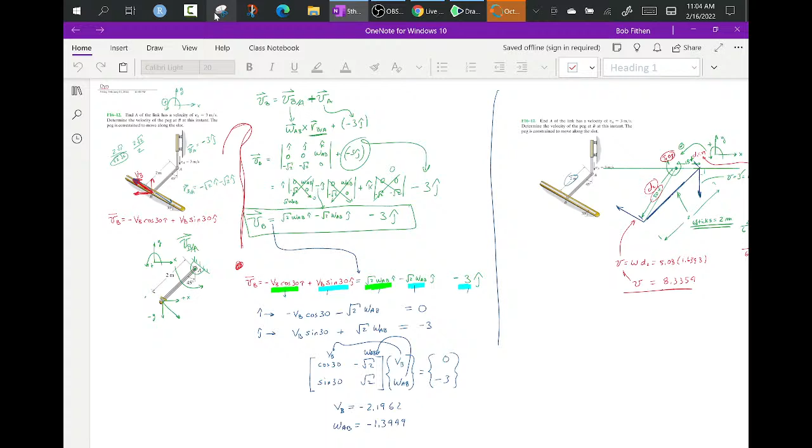What? That's not right. Okay. Okay. All right. Okay, let's see. Oh, wait.

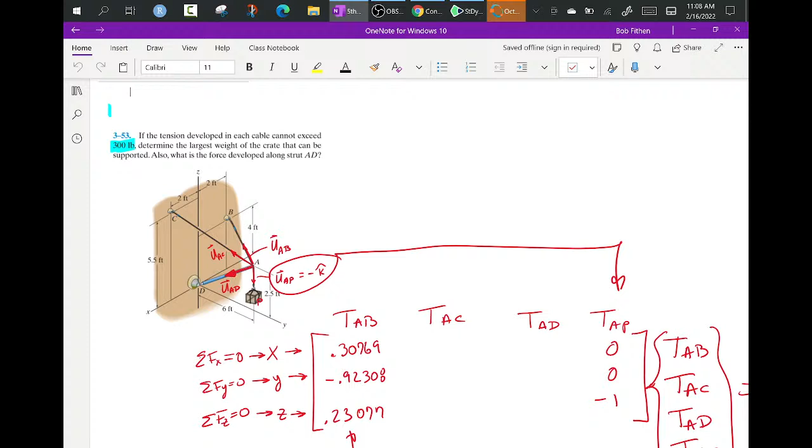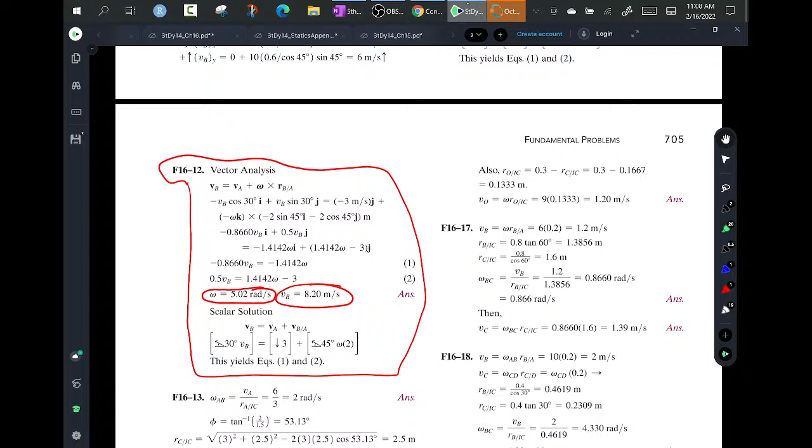All right, so we kind of set this up so that, the book, which I probably should reference, here, let me go in and reference this so that you can see not just, okay, get there, not just that they're different, but how they're different. So let me just pick one. So here's a typical problem.

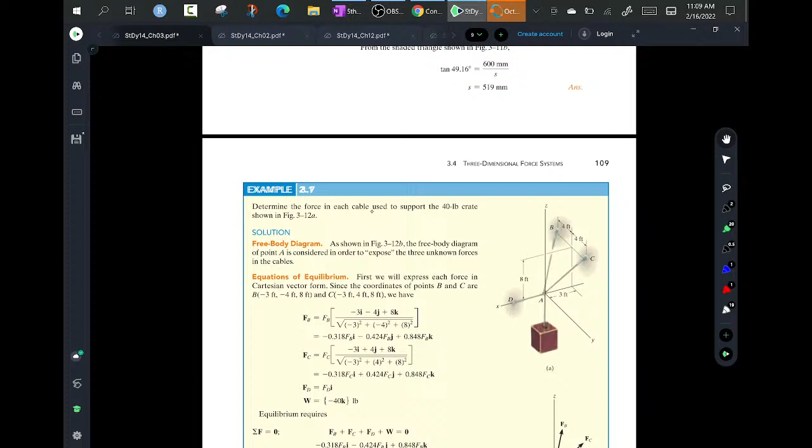So what he's doing, and it turns out he's doing the same thing, it's just I'm formulating it a little bit different. So what he does, let's just look at this for a minute. I don't know why that's the way it is, that's weird looking, that really looks weird. It's like they decided it was going to be one example and then changed the number. I see a 2 and then I see a 3, 2 points and a 1 and a 7. I don't know, I got a faulty PDF or something.

So what he does is he essentially does the same thing. So he's looking at B, he's calling them F's, I've been calling them T for tension. So he's showing the force going up here, and if you want to get to that point, it looks weird, but you go 3 backwards, up 8, and then back 4. So he goes 3 backwards, he's going back here and then up 8. And then he divides by the length of that vector, multiplies times the scalar, and you get these 3 values, the 3 numbers in the FB in each one.

Then he turns and does it for C. So I'm just laying this out so you see I'm actually doing the same thing, but instead of writing the extra in between, maybe I'm shortchanging it. Maybe, I don't know. Heads back 3, up 8, and forward 4. Goes back, then there's 8, and you got the same length. So not too surprising, you see some of the same numbers here as up here, except this one's a positive, that one's a negative. So you see all that.

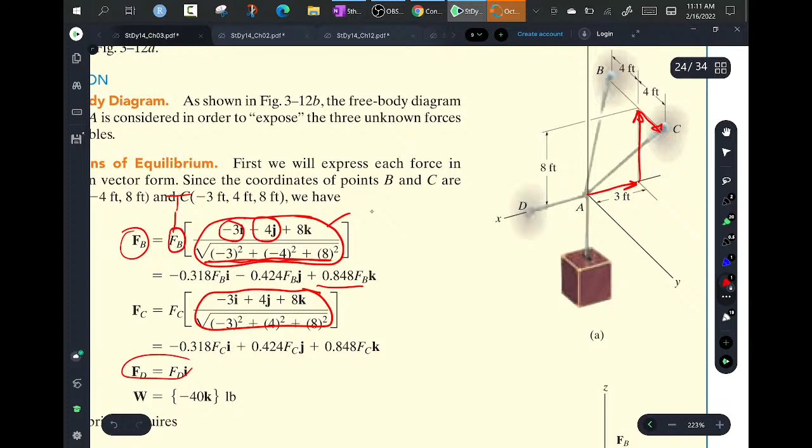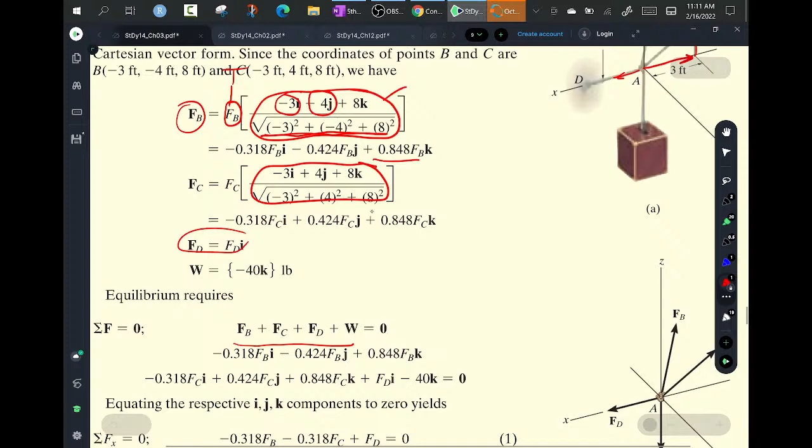He's basically making this, hang on, okay, it's not listening to me. He's making this his unit normal, or his unit vector, that's his unit vector. And he has his FD, which just runs that way. And then what he does is he puts them together. So that's what we're doing. But then what I do, I don't think he does, list it kind of as a matrix. And if you look at it, you could take this and turn it into matrix form.

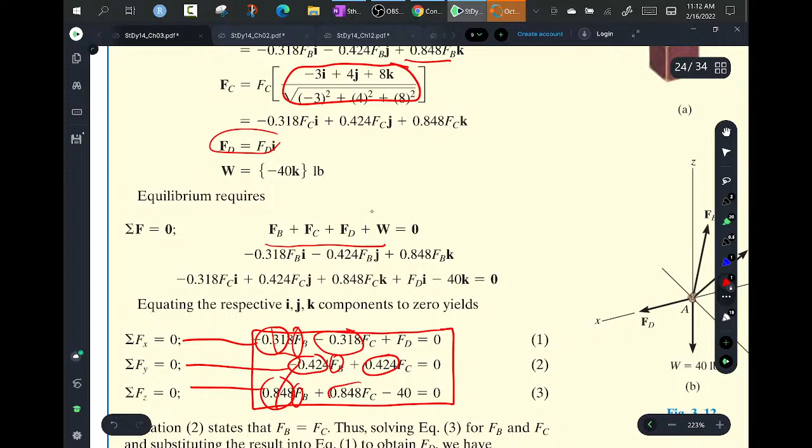And what you find out is the coefficients. If you find, like, here's the FB, here's your FB, and here's your FB. If you look at the numbers, that should be the I component, the J, and the K. So what you see is the unit vector, you see the unit vector off of FC, and then you see the unit vector off of FD, and then you got your 40 that you move to the other side. But he says just solve it. But I focus on first listing them as X, Y, Z, and then focusing on the columns and making this the connection that these are the base vectors.

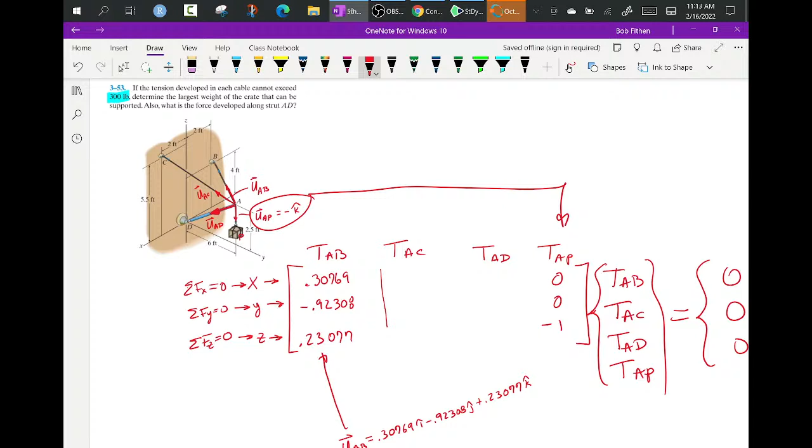And so let's continue that. So I'm not doing anything different than he's doing, it's just, instead of writing the extra part, you know, if you look back at the last 2 lectures, you'll see me sort of formulate this. And at that point you realize, hey, shoot, each one of these is the unit vector in the direction of that. So I'm making the matrix straight up.

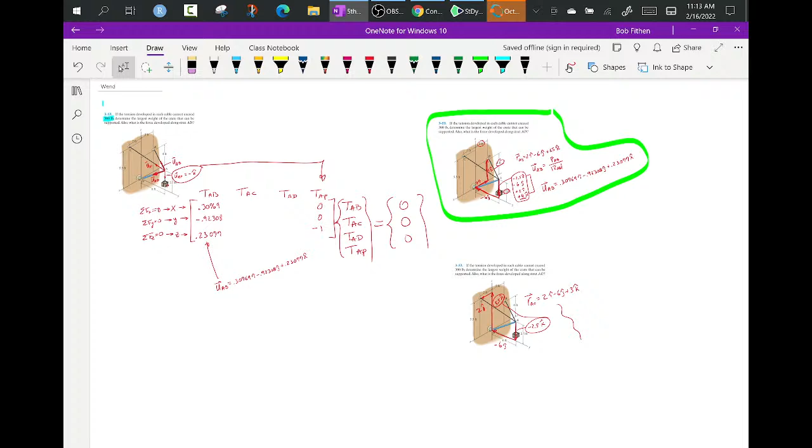There's nothing really different about what I'm doing, so looks like I need to deal with this one. I did that over here, but let's see, I didn't finish it though. So I was looking at the unit vector in AC, I got over here to this, and I was like, okay, I need to finish this up.

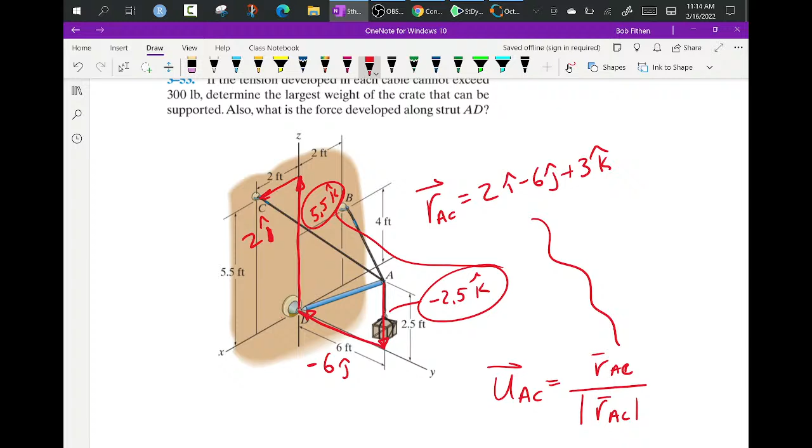The unit vector AC is nothing more than the vector AC over the magnitude of RAC. Now, unfortunately, I'm going to have to re-enter these all back, because I'm sure I had them at one time, but I don't anymore.

So in other words, RAC, let me move it here a second. RAC is equal to 2, comma, minus 6, comma, and there's my vector. So if I want to know UAC, that would be RAC divided by the norm of RAC. Did I type that all right?

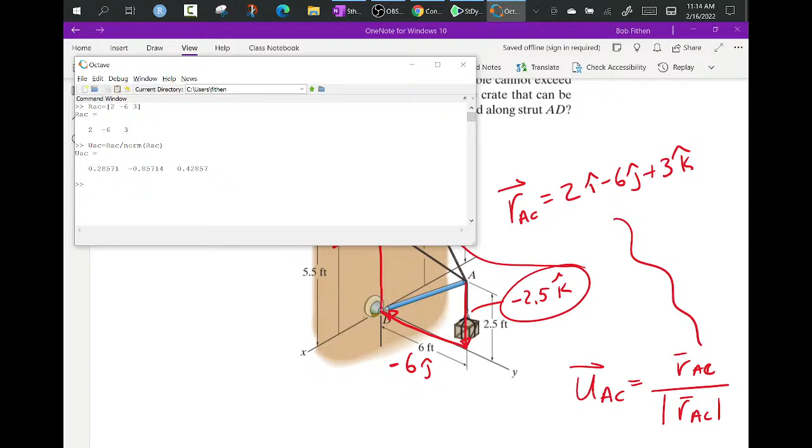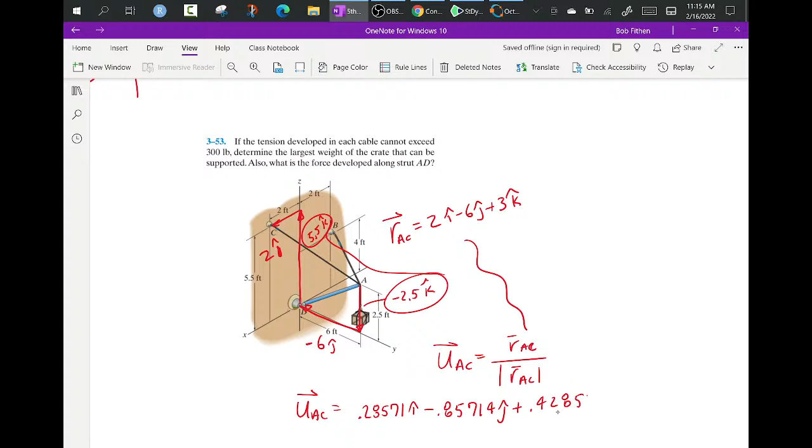So I get this: 0.28571. So UAC, is that minus or plus? 0.28571, got to be plus, minus 0.85714 J plus 0.42857 K. So now I got that.

So what I'm going to do, this time I didn't write it at an angle, so I'm happy about that. And so here I found this unit vector.

So what I'm going to do, I'm going to copy that unit vector. I'm not going to move it, I'm going to copy, Control C. I'm going to head over here, and I'm going to put it maybe right there. Okay, so now I'll be able to just go in here and say, copy this one.

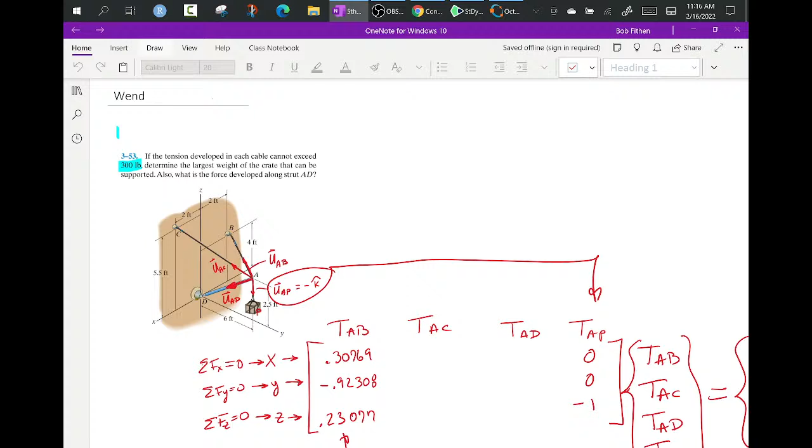Oh no, is it not listening to me? This dumb thing, hang on. Okay, I hit enter, come on computer. It should come back exactly where it was. And hopefully allow me to select a different pin. Don't know why it does it.

So I'll copy those: 0.28571 minus, 0.85714, 0.42857.

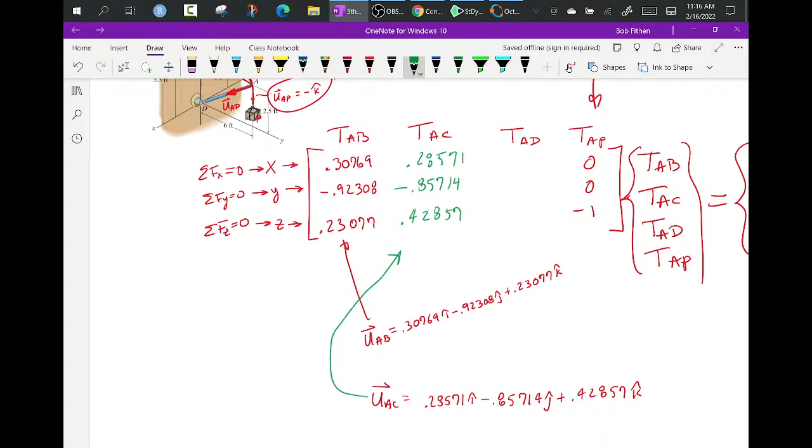Okay, and the last one is one in which I made a comment about earlier. I think I'll just copy the picture from here. I'll slide it over here and drop the picture right there.

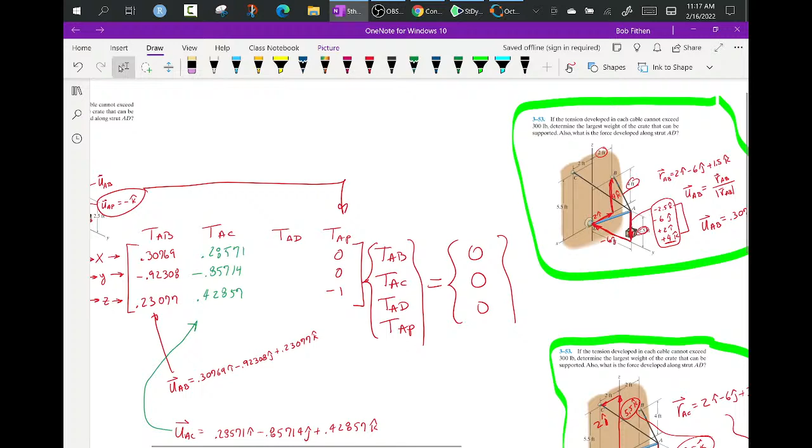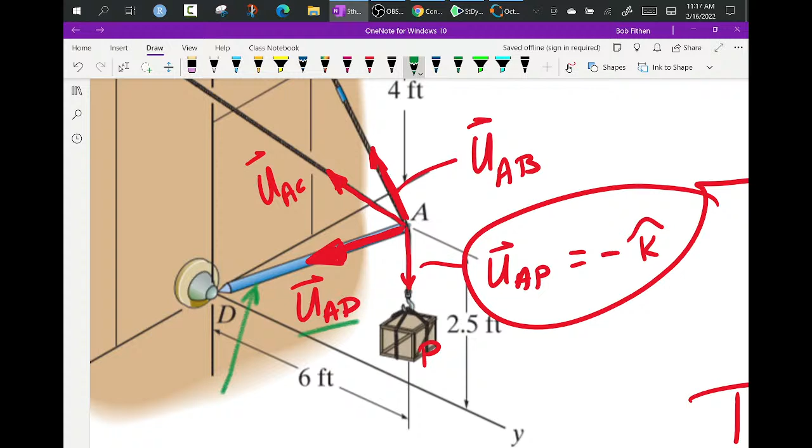Now, what I did is I went ahead on this one and pointed the vector towards D from A. I'm pretty sure that this little member is going to be in compression, which means it's going to flip over. But I'm doing this on purpose, letting you know that if it flips, it's telling you the direction you've assumed is the other way.

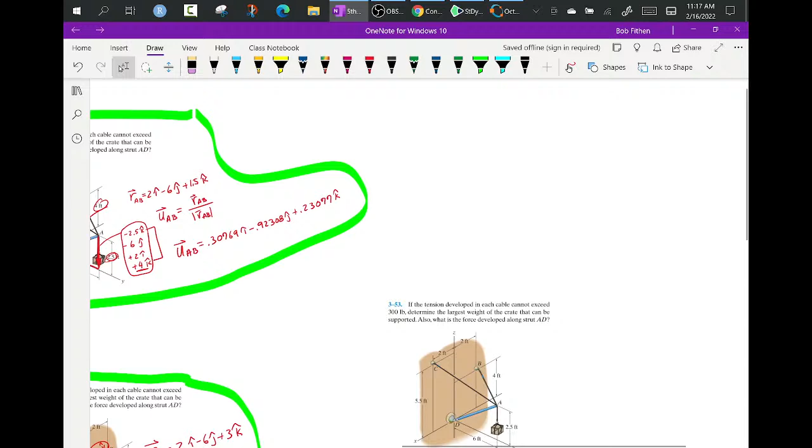So I have picked purposely, let me use this. You're kidding. Okay, well, I guess I'm stuck in this pen, so I'm going to do that. Okay, so I have picked that.

So I'm going to draw R from A to D. I don't know which way I want to go first, but I'll go this way first till I hit here, and then I'm going to go that way. And you notice I don't go any in the X. It's basically, I kind of see this as he's lining this up directly under that. So I get a 0I.

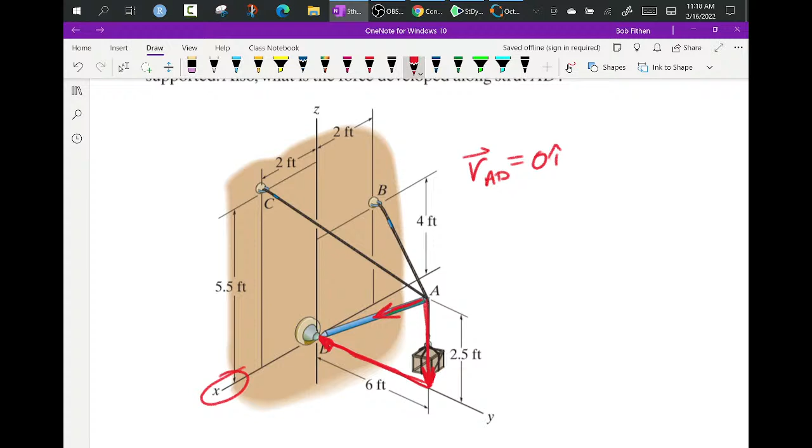And as far as the J, I'm going back, this is a minus 6J. This is a minus 2.5K.

And so now if I want the unit vector going in that direction, I got to put RAD over RAD. Man, all of a sudden I'm hungry.

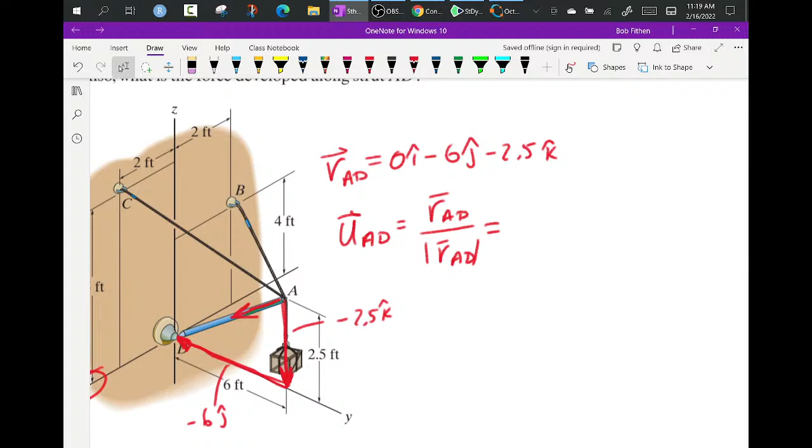Okay, so I'm going to slide down here, go back to this, and I'll just say RAD is equal to, I get a nothing, comma, minus 6, comma, minus 2.5, and yeah, I mean, I can just copy it down. So the unit vector UAD is equal to RAD divided by the norm, or the length of RAD.

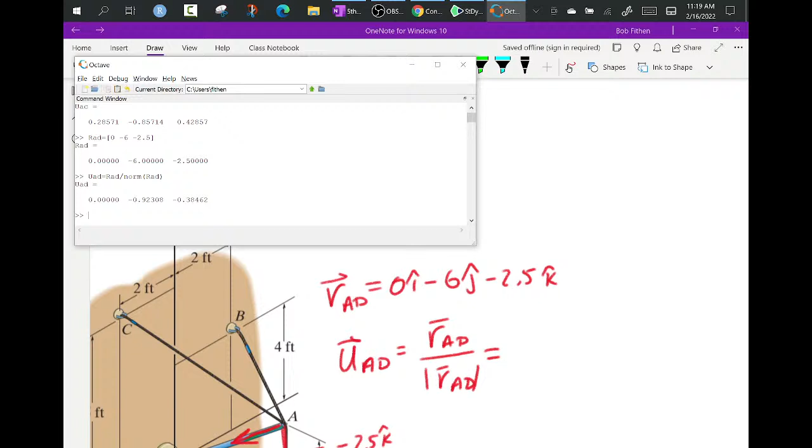Okay, so it's easy, the first one's pretty easy. You know what, I'm going to write it underneath it because I'm going to copy it. UAD equals to 0I. And I'm writing that because there is going to be a location in that matrix that I'm going to need to know, so I'm going to write it anyway.

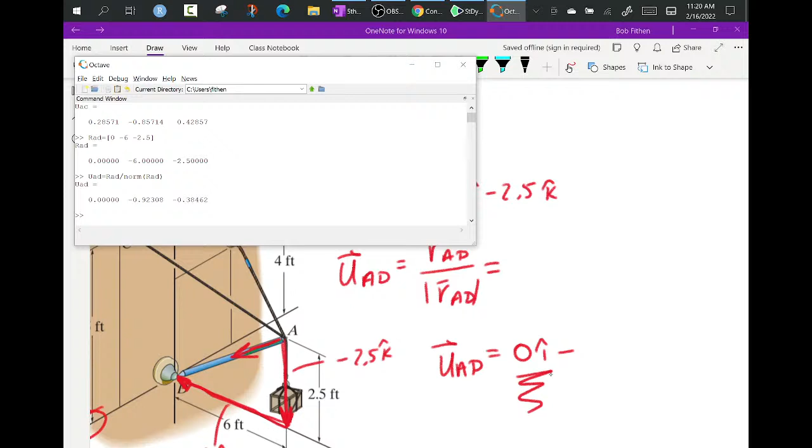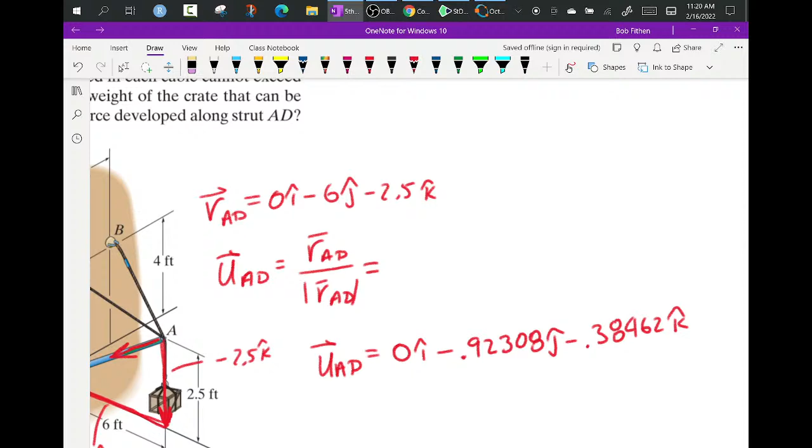0.92308, come on slide over, minus 0.38462. And unfortunately I wrote it at an angle, but okay.

So I'm going to copy this thing, slide back over here, and this time I'll just put it right here. Let me move it up a little bit. Hey, I don't know, I'll just stick to the pen and change the colors in the pen.

Okay, so this one goes here. I do have an entry that I have to put. Why did it do this? It changed the size too. Okay, I do have an entry I need to put, oh, it's not letting me.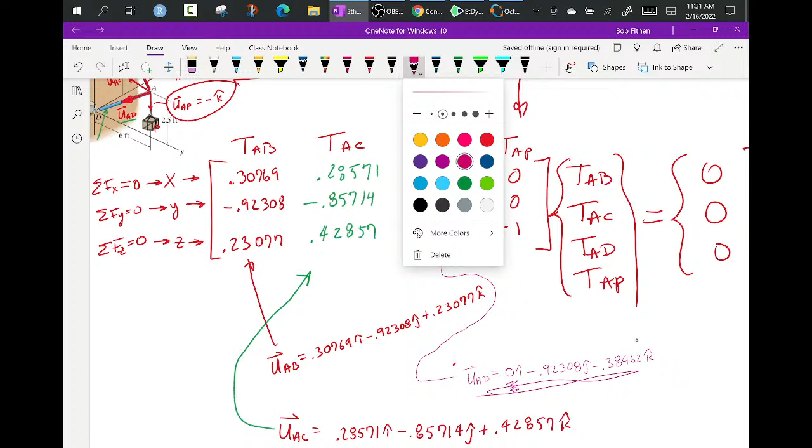Okay, yeah, I do have an entry I have to put here. Then I have a minus 0.92308, and then I have this one, minus 0.38462. So at this particular point, I have everything filled out.

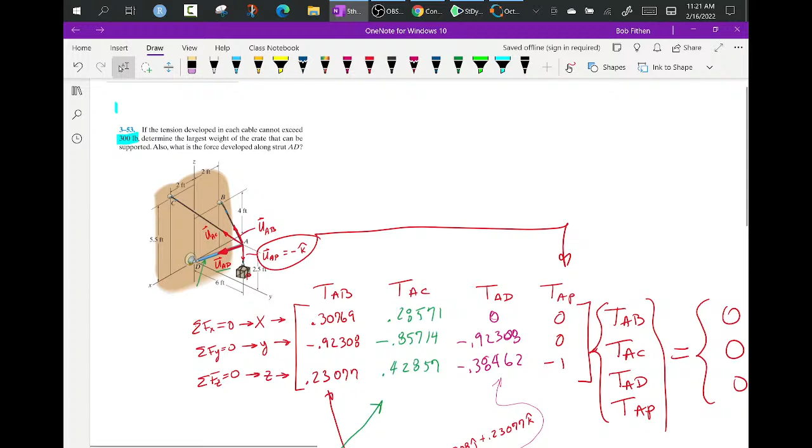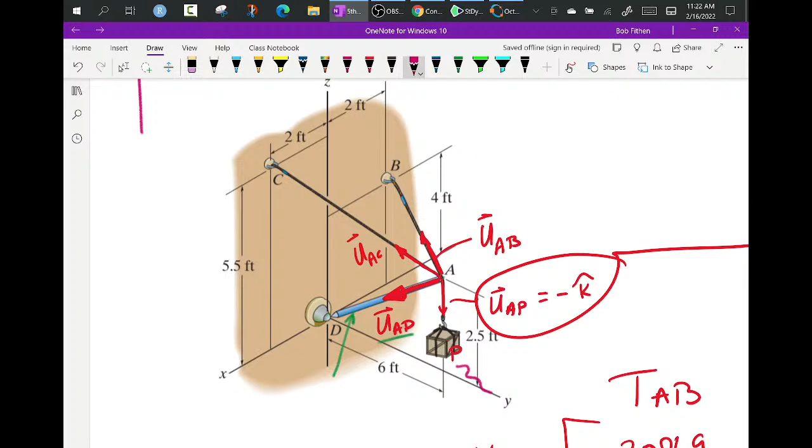Now, if you remember last time, I sort of bailed on one thing, and that is, yeah, that's 300 pounds, but I didn't really identify it as being 300 pounds yet, but now I can. So if you look at this, I got 3 equations, I got 4 entries, but this one, 300 pounds.

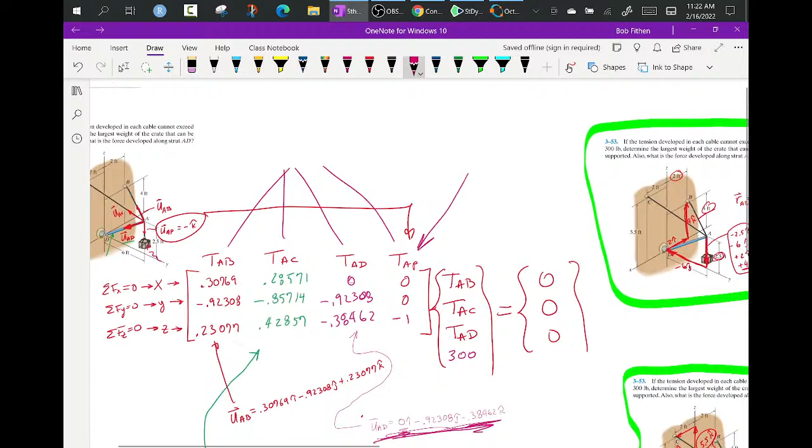So what I need to do is I need to take this down here and put 300 in it. Now, I kind of pushed the landscape here, so I think what I'm going to do, get this junk, kind of slide it under here.

Hello? Man, it's really lagging. I don't know what's going on. There's probably some weird process running or something.

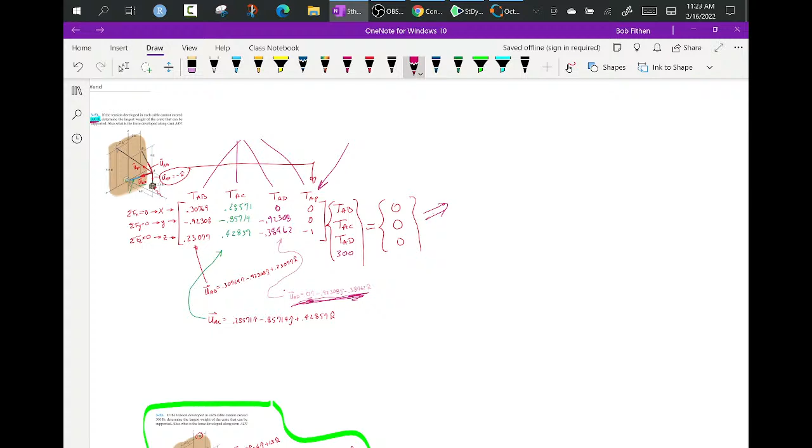So now I'm just in the arena of matrices. So I'm going to take that, and normally if I was writing on the board, I couldn't do this, but now I can do this.

I'm going to go ahead and take all of this. I've already written it all. Do a copy, slide across here and sort of drop it right here. I've learned that it drops underneath whatever mark I make.

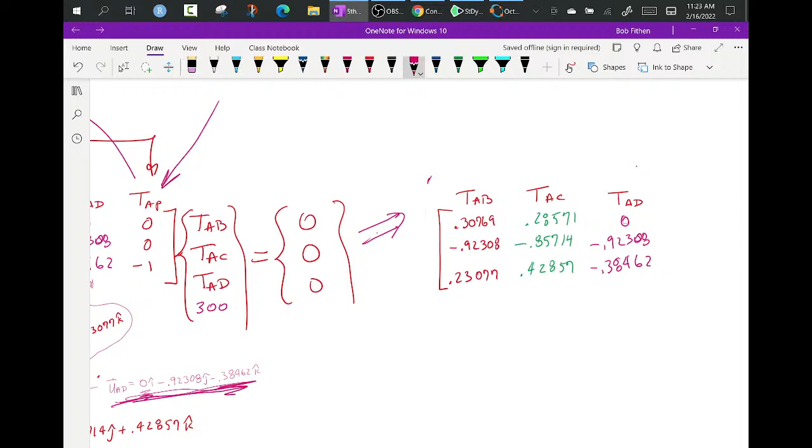And then, okay, then I have this now. And now I'll go ahead and copy all this, but I'm going to erase a part of it. Do Control C, I'm going to drop it maybe right there. However, what I really need to do, I need to take this off and these little chicken scratches around here off.

And if I multiply the 300 times this column, I get, okay it's a minus, so I get minus, and then I get nothing but 0, 0, and 300. And then I get, on the right hand side, I still get this right here.

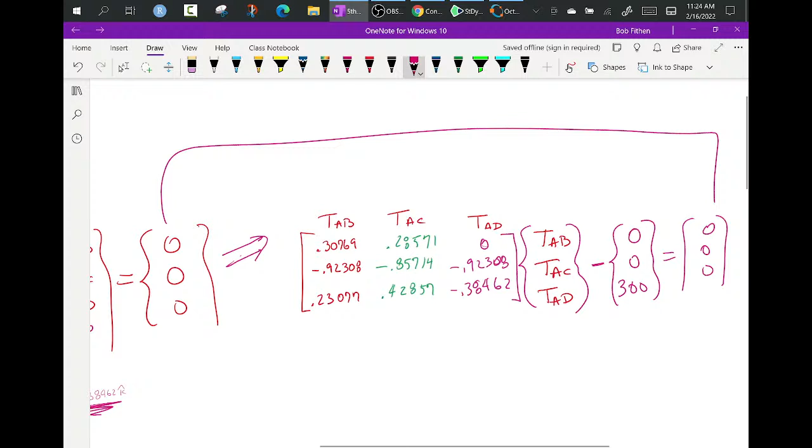So what I've done is I took this column, multiply it times here, left it on the left hand for the moment. I still left it on the left hand side.

But now what I'm going to do, since it's a minus, I can move it to the right hand side. And so let's see if I can do that, move it to the right hand side, then I get that. Because it changes signs, because it was minus 300 on the left hand side, move it over, it becomes plus 300. So I just changed that minus sign into equal.

There we go. Now I still have this in Octave or MATLAB and this in there, so I really need to go put that one back in there. Okay, so I think instead of typing all those numbers, I may go back and do the TAB.

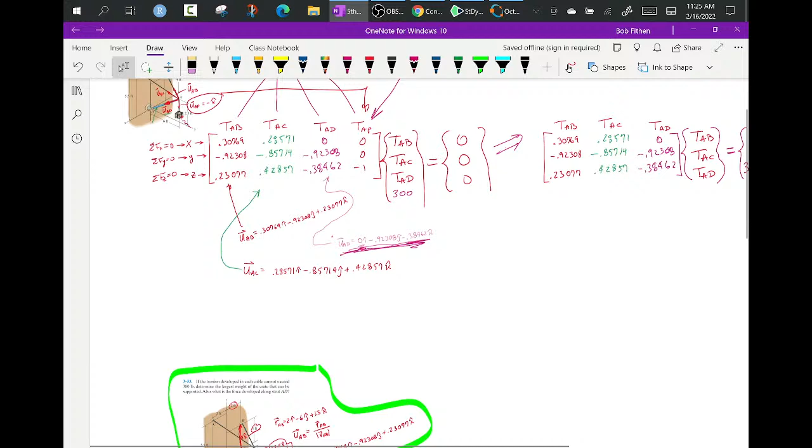Come on, what's going on here? This was in there last time, so I'm going to retype it in there. Okay, so RAB equal to, it's a 2 space or comma, minus 6 space or comma, 1.5, and I get that.

Now I got UAB equal to RAB divided by the norm of RAB. Gives me those numbers again that are listed. So these numbers here are listed right here.

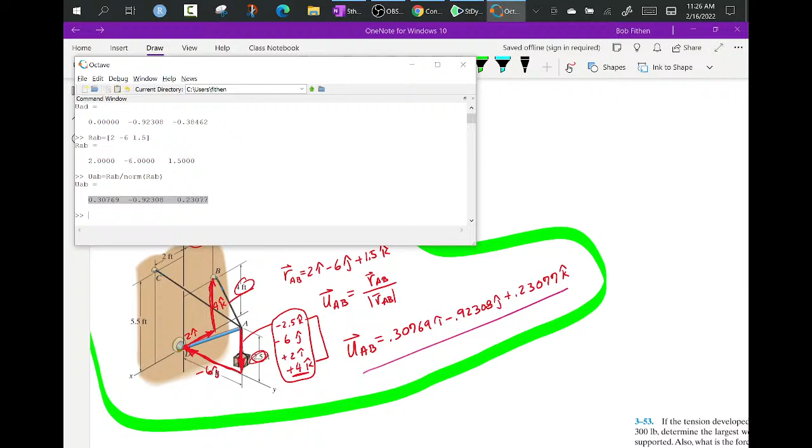So how, okay, so what I've got here, let's go back up here. And this is the reason I left this up on top. And actually, I'm going to do something interesting. I'm going to take this off. I'm going to say this is UA.

You have to remember, TAB is attached to UAB, and TAC is attached to UAC. So these are the vectors, and the reason I'm doing that is because I have these in Octave.

Right now I've got a 1 by 3, one row, 3 columns. So what I need is 3 rows and 1 column. Luckily, MATLAB or Octave obliges very easily to that.

So if I look at UAB, it's a 1 by 3, but UAB with an apostrophe, like in MATLAB and Octave, that's taking a transpose. So it turns it. Now I can come up with the matrix equaling to... you do equal.

UAB transpose. Now I'm going to do it wrong first. I'm going to put UAC transpose, and then UAB transpose. So what it did is it stacked them on top of each other. So that's wrong.

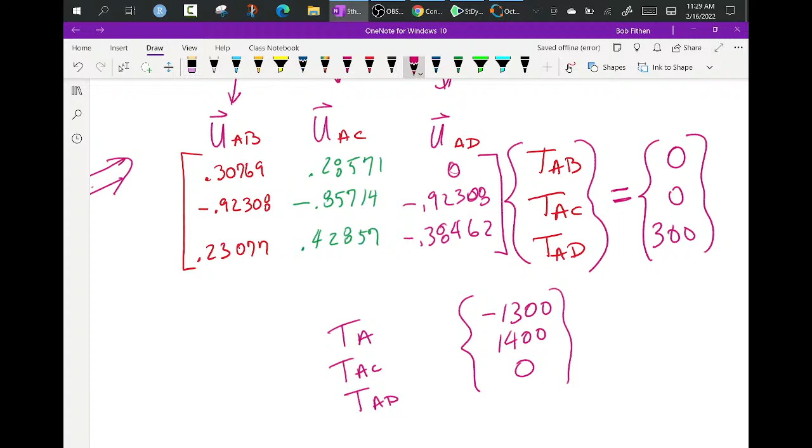TAD. No way, that is completely wrong. But wait a minute. Let's make sure I did this correct. Okay, first, did I put it? It's going in the minus Z direction.

Let's double check, TAB. I should get it going a little bit to the right. As far as the Y, it's going back. As far as the Z, it's going up. So I feel like I'm okay there.

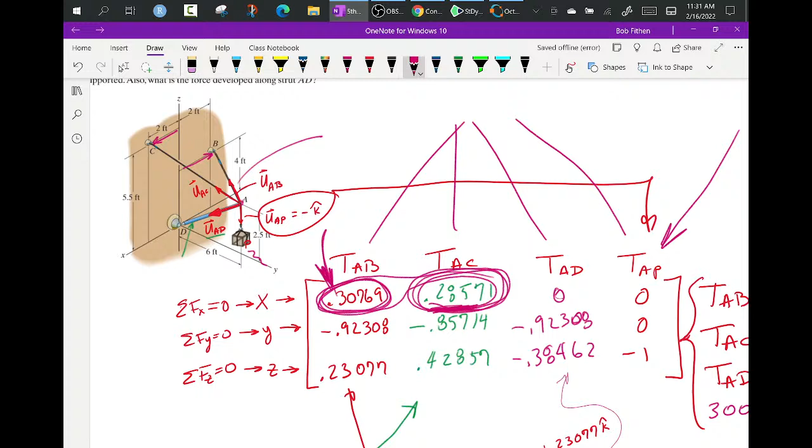Now, TAC, going back or forward. Uh-oh. This is the X, and this is the X. Uh-oh, because to get from A I had to go this direction, and then I had to go this direction. So the TAB, that has to be negative. That value has to be negative.

Whoa, I made this mistake the other day. Okay, let's see what I did here. I went minus 6 in the J, but that is not plus 2, that is minus 2. And what?

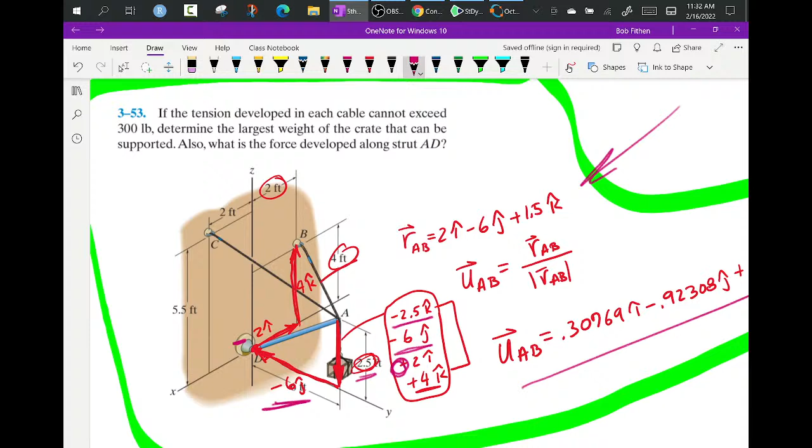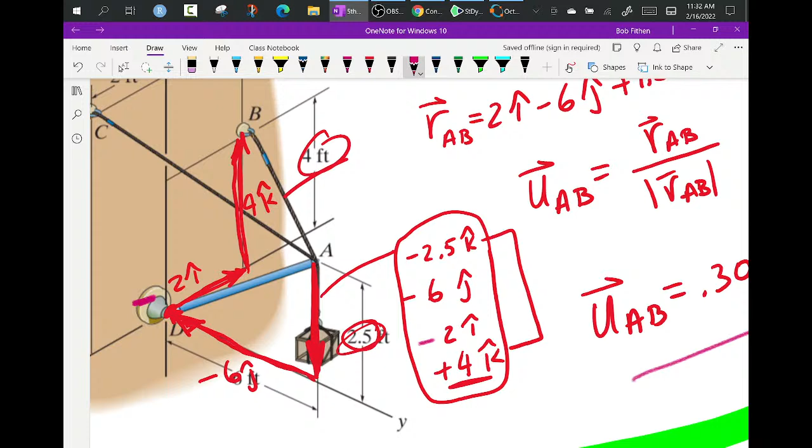Okay, wait a minute, let's double check this. Okay, I went down 2.5. I went backwards in the J. I went backwards in the I. Okay, wait a minute, this has to be a minus sign. Then I went up, so in fact there's a minus sign sitting right there.

Believe it or not, I think everything is A-OK because the magnitude's still the same. I think what happens is this becomes a minus, so this becomes a minus. Now, if I made one mistake, it's possible I made two. Okay, where's my pen?

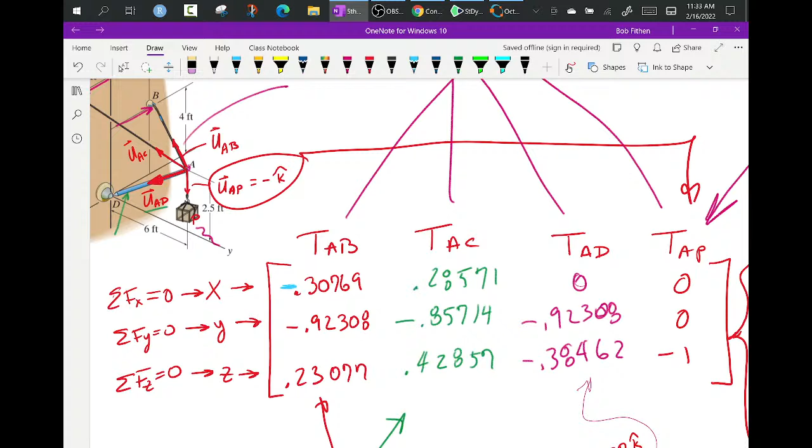Here, I'm going to make it blue or something here. There's my... and why is it making it bend like that? I don't know what it's doing. So, made a mistake there. Let's see if I made a mistake on the second one. So there's my first mistake. Let's see if I've made another mistake.

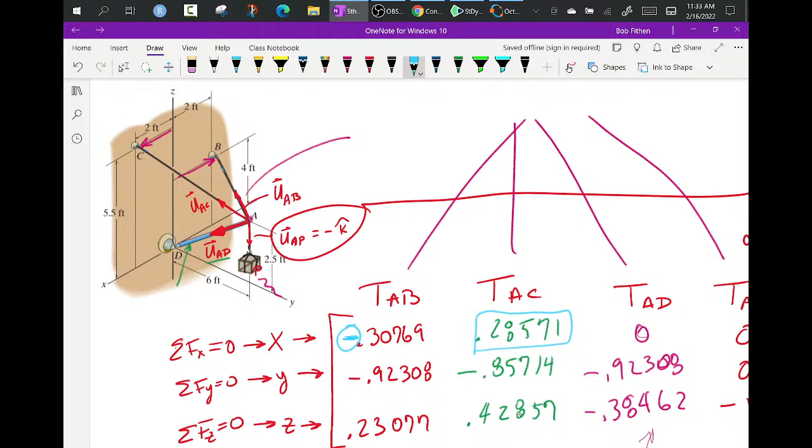Okay, this has to go, it says positive. That's the positive direction, so yes. Is that negative? The y direction. Now, at first glance, you may say it's still 6 on either one, but this was a different height than that one, so this value here may not match that one. But the direction's okay, and then the direction in the z, it goes up a little bit more than this one.

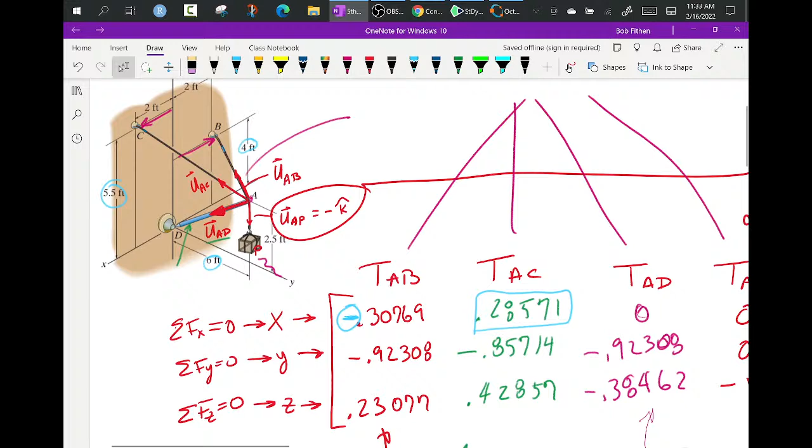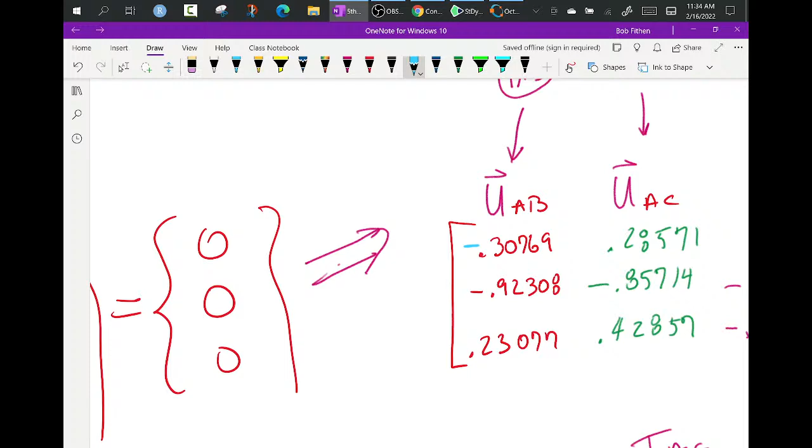Now I'm going to go ahead with it with my fix on TAB and see what we got here. Okay, here's my fix. Let's see what we get. So it's not equal to that. There's no way that's going to be the case.

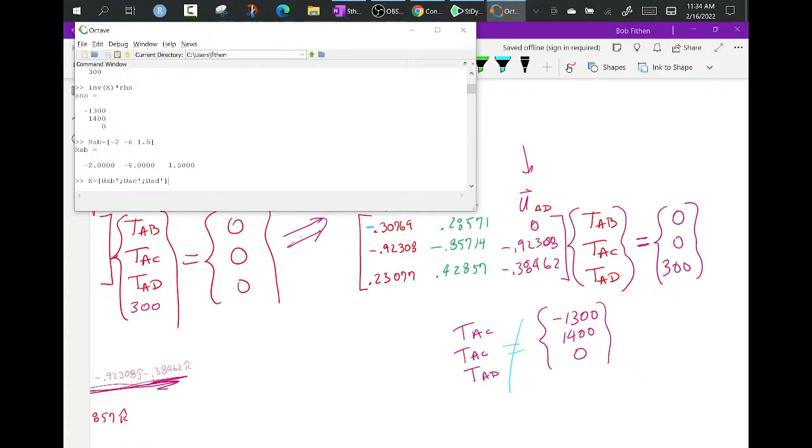Okay, so let me go fix my TAB. There's my TAB, that was supposed to be a minus. Okay, that changes it to a minus sign. Now I'll go ahead and do that. Looks like I'm okay there. The right-hand side should not change. All right, so that had a big effect.

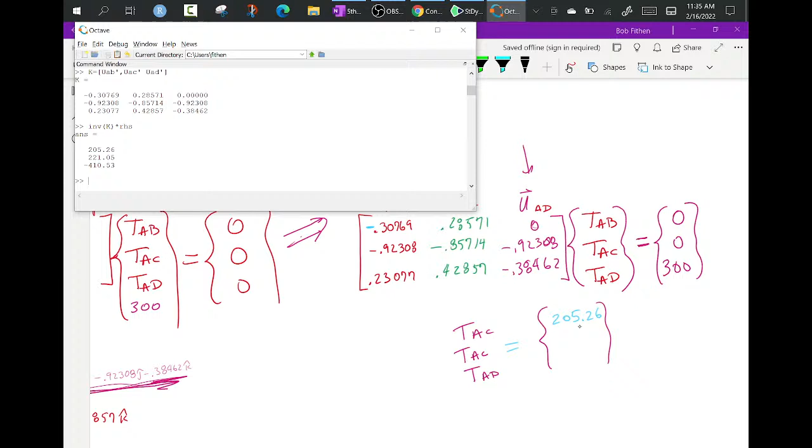So one little mess up, which actually didn't occur today, it occurred the other day. 205.26. I'm still not sure that's right, but there's no way... there's just no way. And minus 410.53. So the first thing, I'll look at the numbers in a minute.

First thing is that became a minus. All that means is instead of hello computer, hello. Okay, all that means is my assumption that it's going this way is totally wrong.

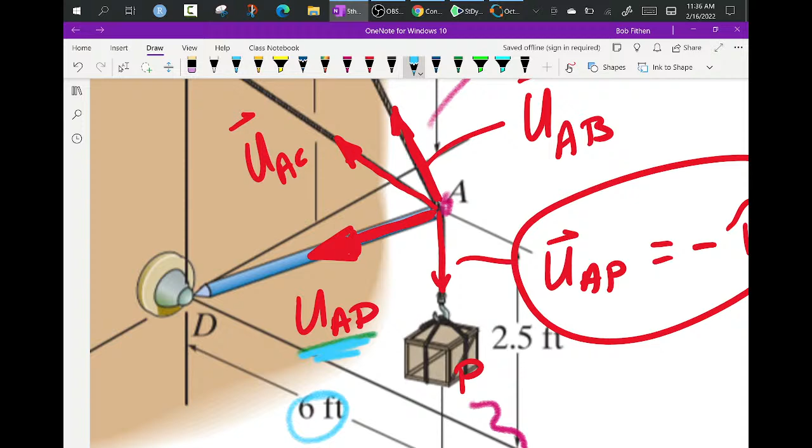It actually goes the opposite direction of that vector. That makes sense because it's drawn as like a funny rod, and it's not in tension, it's in compression. It's sort of holding it up. So I did that on purpose, but I will tell you I didn't make that other mistake on purpose. But hey, that's the way the world works. There's lots of mistakes, that's why you have to check things.

Okay, now I'm going to check the answer. So to do that, I got to figure out what the problem is. 353. Either dash or dot, 53. I don't remember, but I do know it's 353.

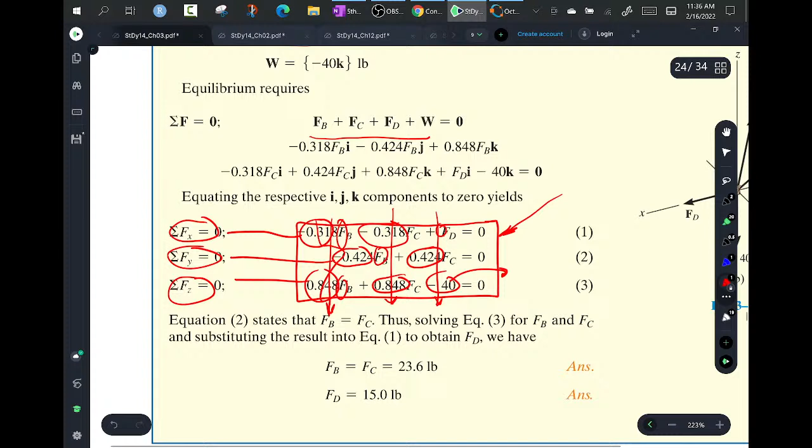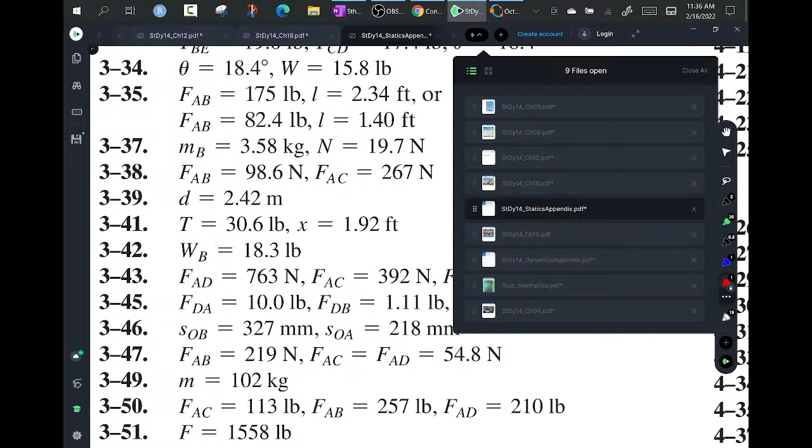Okay, so if I go here... gosh, this thing is slow. I'm going to have to try to figure out what's going on here. Huh? Oh. Did I get the wrong number? Is that 353? Wait a minute, is it F353? 3-53.

Oh, what? Wait, he wants to know the strut. Determine the... oh, the largest weight that can be supported. What? The tension in each cable cannot exceed 300. Oh, I read the problem wrong. Okay, we can fix this.

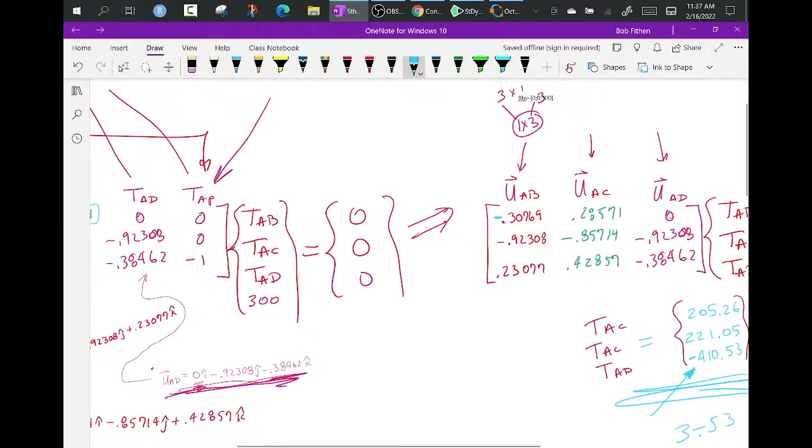Here we go. If 300 pounds gives you that, the question is, if we want to, here's what we'll do. I read the problem wrong. So let's do this. Boy, I goofed this one up big time. Instead of 300 pounds here, I'm going to go back and say it's 1 pound.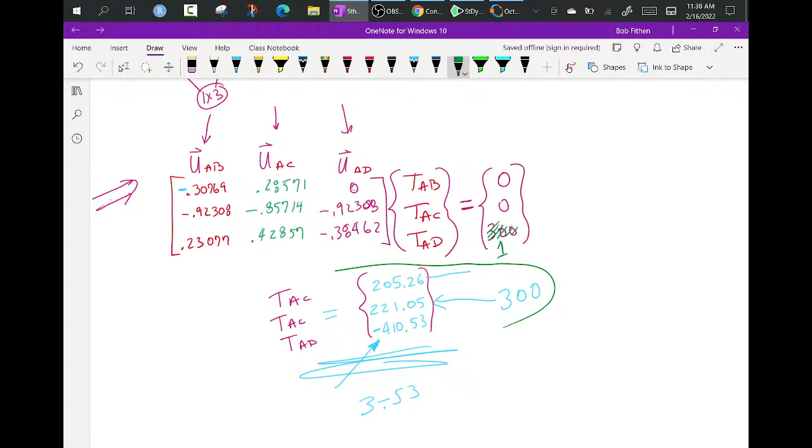For 300, you'd get this, right? Now, if you got 1 pound, what would you get out of here? TAB, TAC, and TAD. So this is easy enough because all I need to do is go change my right-hand side.

That's not where the right-hand side is. This is where the right-hand side is. So I'm going to change my right-hand side, which is now that. I'm going to change my right-hand side to this. Looks like rain out there. So with my right-hand side that, now I go back and take the inverse times the right-hand side.

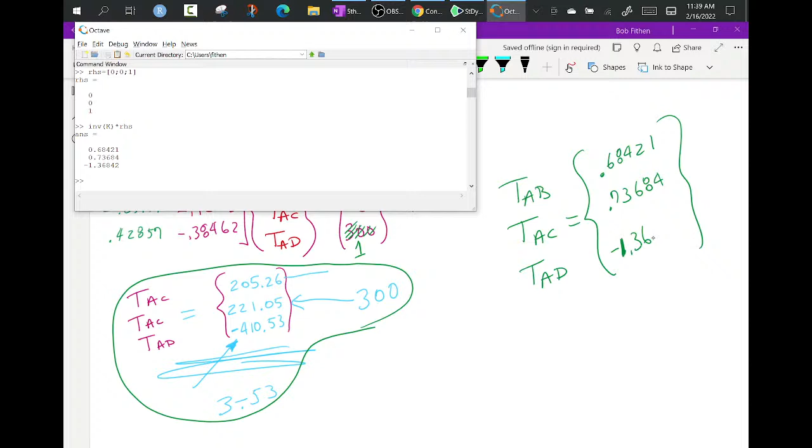Okay, this is funny. 0.68. So if I put 1 pound on there, 6421, then 0.73684, and minus... okay, what was that? 1.36842.

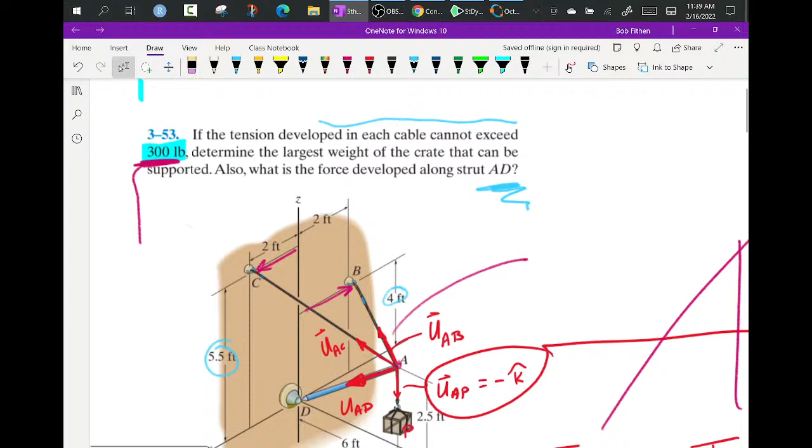Now, okay, I just jumped. I didn't read the problem right, so I've kind of botched this whole thing up, but the method is still fine. If the tension cannot exceed 300 pounds, what's the largest weight? So now all I do, okay, hello, is I go over here and I say 1 pound gives me that, but it can't be more than 300. So the largest for 1 pound is that. So what do I multiply 1 pound times to equal that?

So here we go, I want 0.73, I'm picking the largest one. 0.73684 times the weight, because the weight is 1 now, equals 300. So if I put in, and we'll double check this, 300 divided by 0.73684 gives me 407.14 pounds. Now, with that, let's double check.

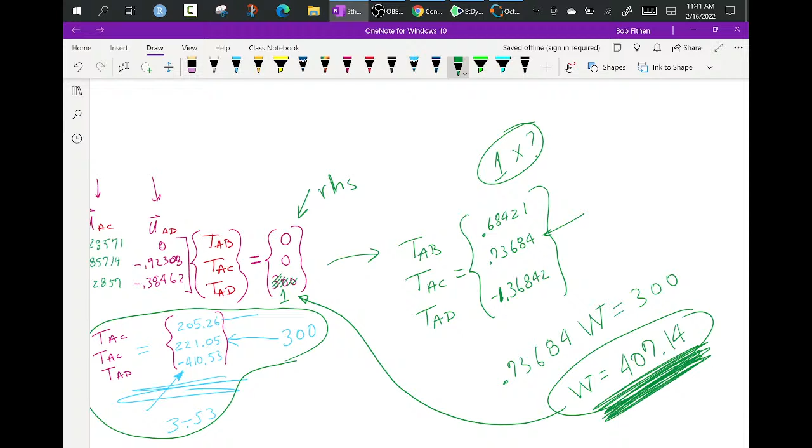What would happen if instead of 1 right there, I put 407 pounds? That's easy enough. So go back to my right-hand side, and instead of 1 pound, I put 407 pounds. And I'll even put the decimal point.

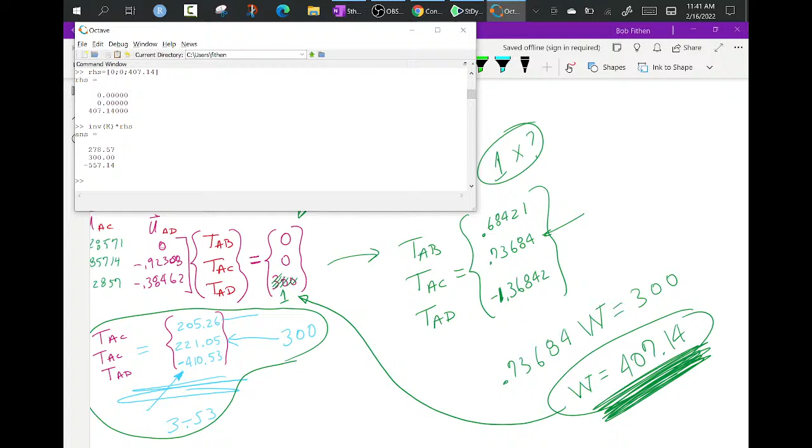So there's my force or weight. Do my right hand, do my solution, and lo and behold, we see the middle number. So if I put 400 pounds in TAB, TAC, and TAD, this would be this, this, and this. This would be, well, this was the 300, so we matched that one.

The other one's 278... I forgot. 57. And the other one was minus 557.14. Minus because I made the assumption it was in tension, and in fact it's not, it's in the opposite direction. So, did we get the right answer now?

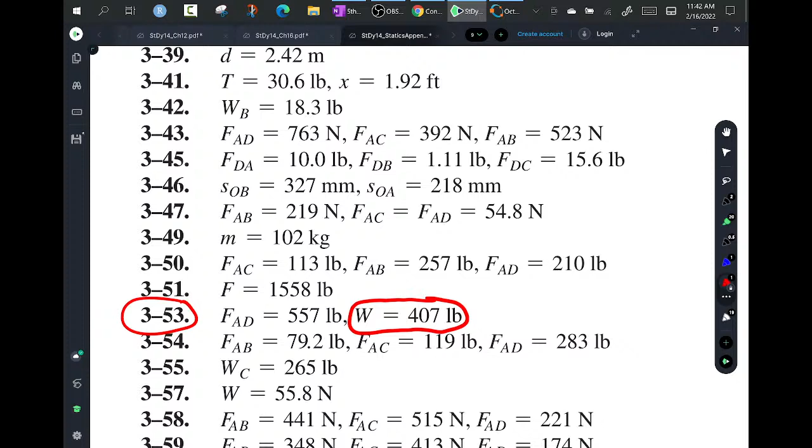Let's see. Okay, the weight, 407, so we got that. And then the other one was the force in the strut, was 557, which is that. He never asked for that, but it's less than this anyway. So sorry for the botch up, but that's okay, you just keep going through stuff.

Key is if you botch up, you just accept it, go on, figure out what you did wrong, go from there. Let me see if I can change.

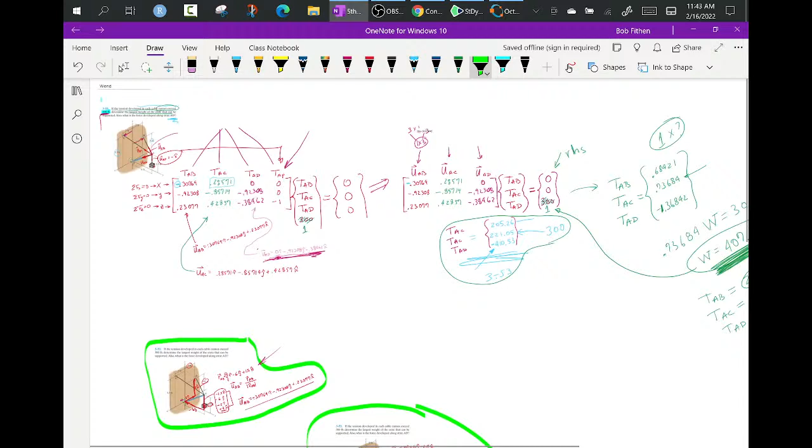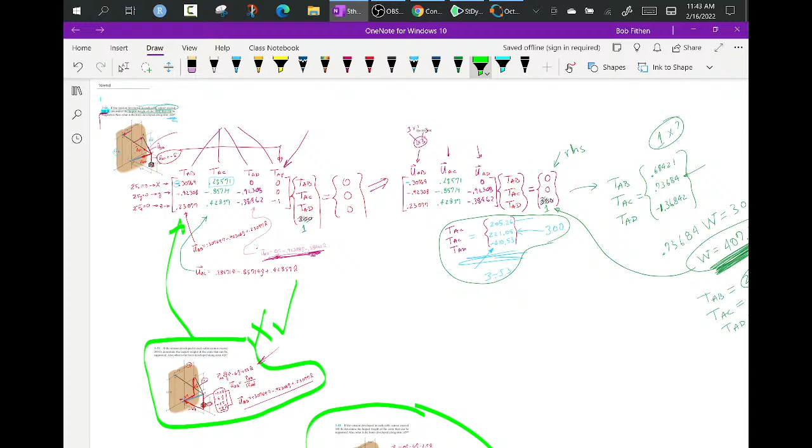Now I can change. So this is one of the unit vectors. What I did, again in review, I kind of took my unit vectors. I goofed this one, but then I fixed it. And then I did this one, I think, second. And now I did this one second, and then this one third.

Columned them, made them into a column, you can see them here. So you got one of them. Here's my first one that I kind of botched. Then now that I can change colors, and I don't understand why sometimes this does, and then that one. So those are the unit vectors.

Then I identified them as a unit vector here and fixed the mistake I made. So there's my big mistake. I identified them that way.

I identified them because now I can go back to MATLAB, Octave, whatever you want to call it, and turn them into column vectors, list them in the matrix, and then just carry on from there. And it's surprising how that one minus sign right there made the answers so bizarre.

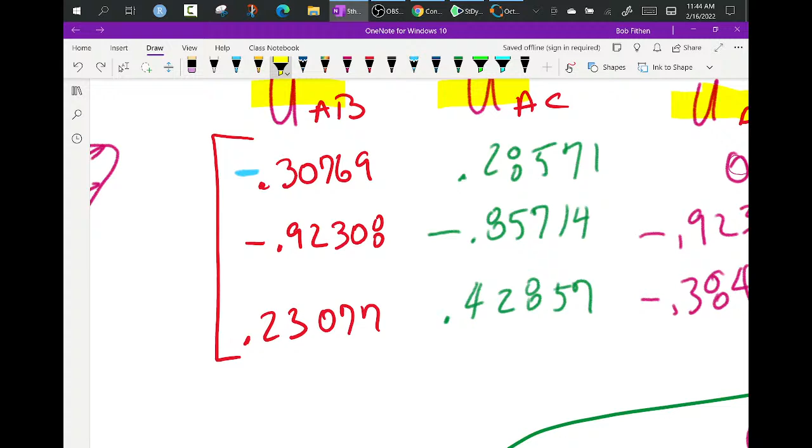But, you know, that's life. So it's 11:44. I really don't feel like doing another one.

We could talk for a minute about, do I have 4 up here? Yeah, I do. Chapter 4.

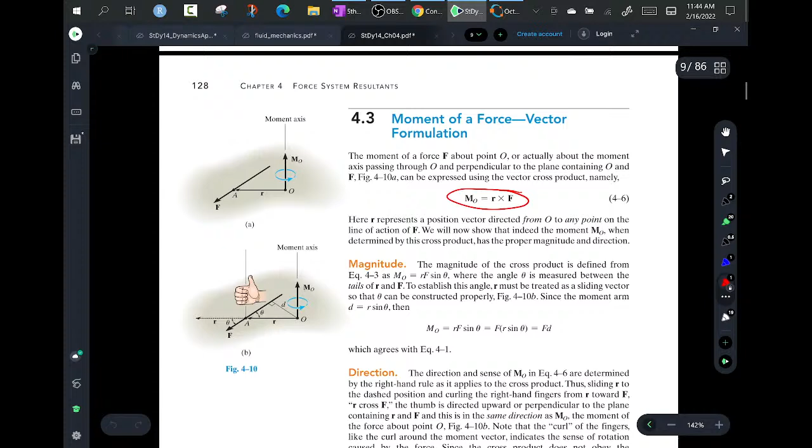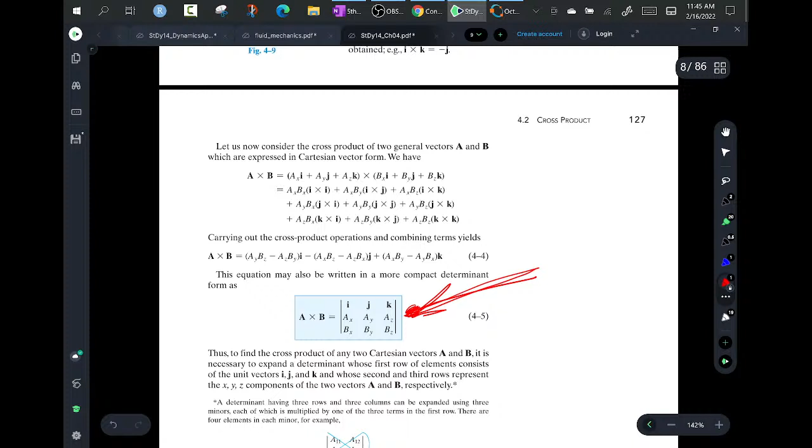Okay, so chapter 4 deals with moments. I think I talked for a minute about this, and so you'll have to get used to... okay, here we go. I tend to do moments this way. That's the way I find, because to me, I can actually carry this out. Even if I make a mistake, I can see everything listed there and go back through it.

So what I'll do next time is I'll start doing problems in this chapter 4. And there's a lot of side issues there, but, you know, it turns out I always go back to this because it always works.

Did all that make sense, I guess? Sorry for the mess up, but I mean, that's life. I get to the point where I've done this so long, you know, it's not like I don't care, but I don't. You know, that's fine.

You don't make that up. Well, are y'all have any questions? Oh, really? Oh, this really? Oh, okay.

Yeah, and there's something interesting when you take dynamics. If you do A cross B, you get a vector C. I did a test, I showed you how to do a test, because the answer C, if you dot it with A, is 0. If you dot it with B, is 0. So that gives you a way to test your cross product. That's okay.

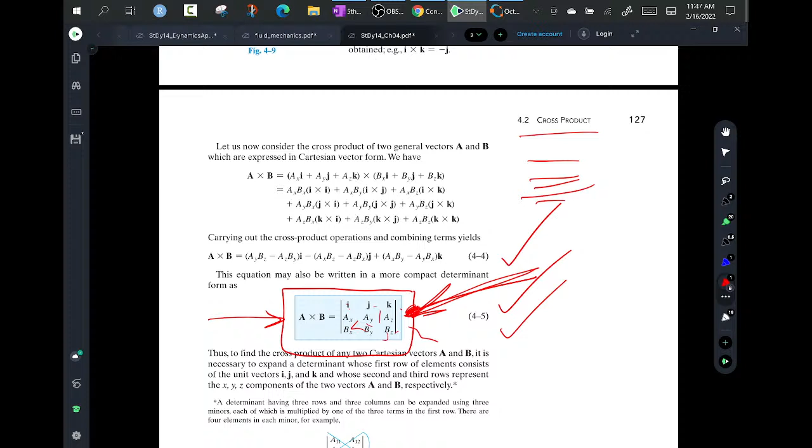What was that? There was a big flash on the screen. I don't know.